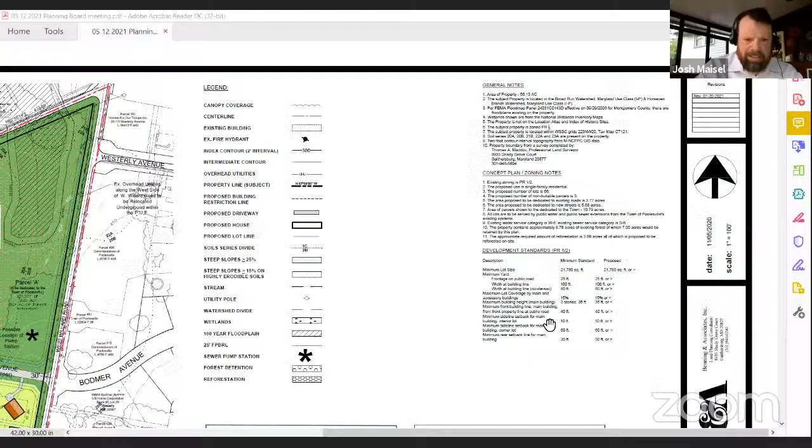Yep, now Josh is the host. Awesome. Gotta love technology. Make sure he's a co-host, Kevin, not a host, because if he leaves, then the meeting will close.

Okay, let me go back in. Okay Kevin, where am I going? Just hover back over him and make him a co-host instead of host. Well, I lost him, so I'll have to find him. Participants. I could hang out with you guys all night too.

I mean, I haven't seen Wayne in a couple years. Now Kevin, you're the host, but you're gonna have to make Josh the host. She can't do it now. There's no co-host. Josh, he's the host, you got to make Bobby a host. Right, so before you leave Josh, just make Bobby the host again. Oh, I can hit stop screen share. Yeah, and then that should be great.

Okay, are we all on board? Yep, we can see it.

Okay, so this is the plan that I brought to you guys last time after you gave us comments. We went back and seriously took into consideration all of your comments. The number of proposed lots has been reduced from 74 to 66.

So Josh, my question was, just brainstorming out of the box thinking, you know how I don't know if you've seen the Willard proposal where they have the front houses on Fisher that face Fisher, and they have rear entry via an alley or something. I was wondering if the same could be incorporated with this plan, where the front facing on Willard, instead of having driveways, are accessed via an alley.

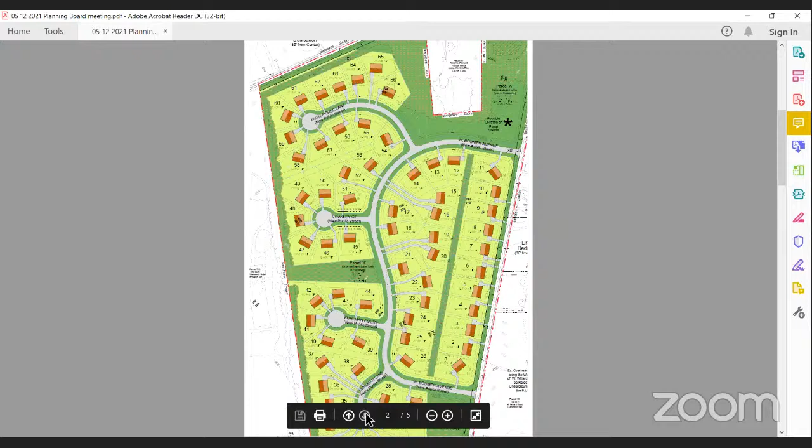Well Kevin, we got rid of most of the pipe stems, except for the back corner, and I'll speak to that if you guys give me a second. The direct drive access to Westerly Avenue has been eliminated from the plan. You guys can see this along here. We brought a cul-de-sac into there. Down to the south, the new streets with the cul-de-sacs have been added to eliminate most of the pipe stem lots and long parallel driveways shown on the earlier plan, which you guys asked us to do.

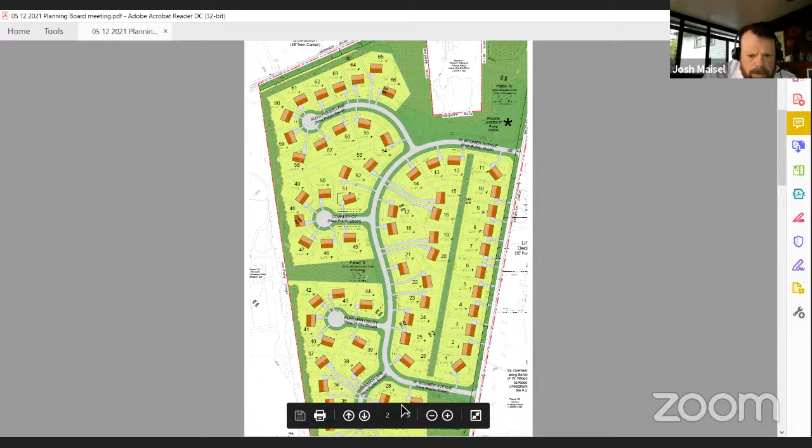Parcel A up here, this is to be dedicated to the town. It has been enlarged to retain more forest and to provide a suitable area for the planned sewer pump station. Forest conservation areas have also been identified on this plan. So that's parcel A, what's going to be dedicated to the town eventually with the sewer pump station.

And then I just have, wow, I don't understand this thing. And this is our NRI that we submitted.

With all the discussion going on tonight, I know we shouldn't be asking for approval of our concept. What I'm asking is, can John review the NRI at this point? If we're going to start moving forward with everything, John needs to have the ability to review the NRI so I can start submitting stormwater management concepts and start doing percolation testing. So Josh, that's possible, it is part of the preliminary plan, the NRI FSD, not part of the concept. But if I get direction, I can do that. I'd like you guys please to give direction to John to review the NRI for us.

Isn't it about fees also, John? Now, if there was an agreement for them to pay the freight outside, that's a separate issue. I'm sure Mr. Jameson would be more than willing to do that. Can someone reach out to me and tell me what that fee would be, or is that on the fee schedule?

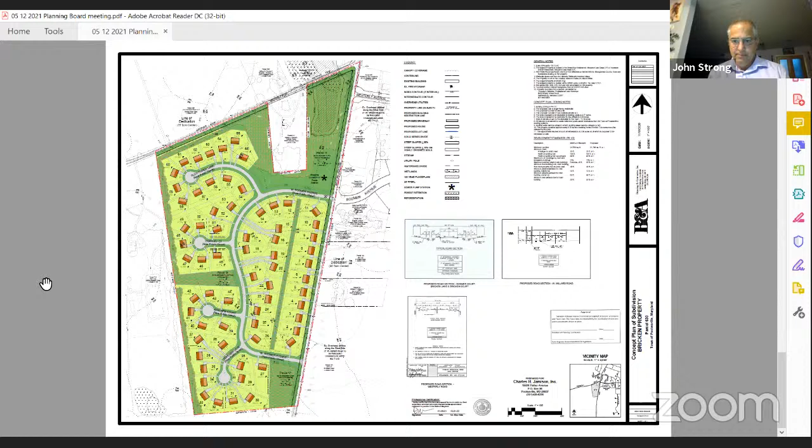Yeah, we talked about that in various scenarios with the past town manager. Amanda, thank you for letting me jump onto that discussion. No, of course, that was totally pertinent.

The next thing, as we've talked about before, is that there's no park or playground here, and this is not a super easily walkable space. Having a young child, I know how important playgrounds are to have in a community or incredibly close by. Stony Springs is not far, but the playground there is actually quite far. I don't know if you're proposing a sidewalk up by parcel A and straight up to the corner, but there's not a lot of walkability there, and it's not a super safe road to walk on. So that's a concern as well.

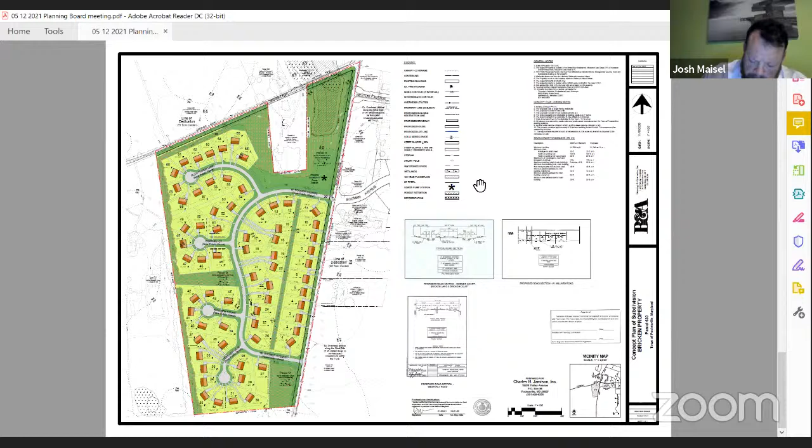Okay, and then I just want to check real quick, the dotted lines around each home site are the setbacks, correct? Those are building restriction lines. So yes, ma'am, that's correct.

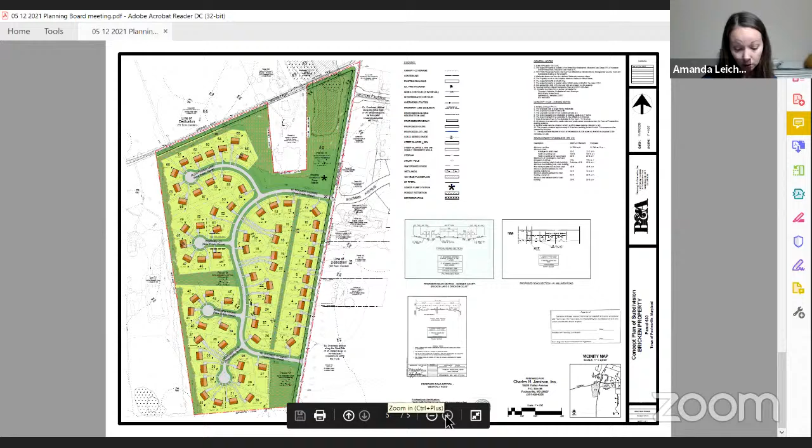If you look at some of the homes, particularly home site number 40, 43, and 32, if you zoom in particularly on 40, there is no room next to the edge of the house. The one edge of the house is literally on the setback line, and that would dramatically impact the homeowner if they ever decide they want to build a deck or anything. You can see home number 40, there's nowhere to do anything in that backyard. Correct, at all. So I think 43 is the same, it's just the opposite corner of the home.

The building restriction lines, if you look at the code, it's what's under roof. So there would be other areas that go into that. It's just the building restriction lines are for the actual physical building. The zoning codes have different rules for accessory structures and swimming pools, stuff like that. So like an enclosed deck or something, if it was enclosed, then it becomes roofed and therefore part of a structure. And that is odd that you should bring that up, because I was bringing it up.

That is page 82 of the code, definitions, building line number 23. And it reads: a building line is a line beyond which the foundation wall or any enclosed or covered porch, vestibule, or other enclosed covered portion of the building shall not project.

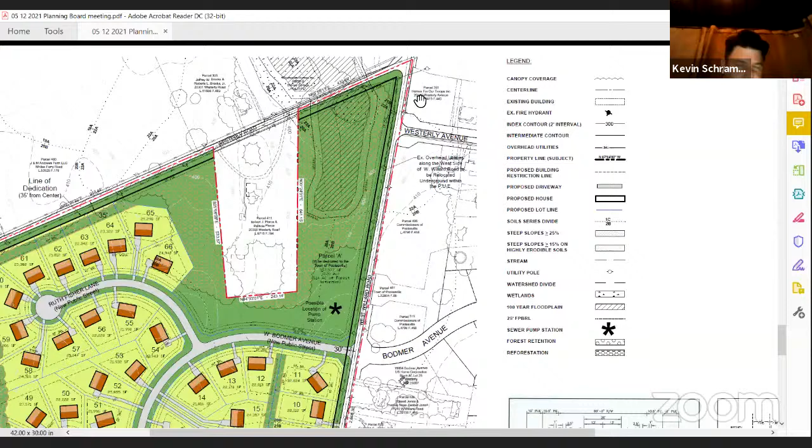One last thing, and this goes along with what I was saying about the layouts of the homes—knowing these could be very different, homes 11 and 1, which are on the diagonal matching how Stony Springs' corner homes are positioned, it makes it so there's no room for a backyard. I don't know if these are on the same angle as the Stony Springs homes, but potentially changing to a larger angle so there's more backyard space might be helpful, since they can go anywhere in there. So I guess it doesn't particularly matter right now—I could change the plan, but when they come to build this, they would build what they want to build.

And I don't want to have a bad reputation down the road and think that I presented something to you erroneously and lied to you. That's not what I want to do. Okay, I live in this town—I don't want to destroy my reputation. I enjoy living in this town.

Yeah, you guys are just asking some things that in reality can't be enforced unless you create some means for it to be enforced. Amanda, one of the other things is when we get to this issue of zoning compliance, we'll talk about the way that the side yard and the backyards are determined on a corner lot. So it'll be a little bit of an education there too.

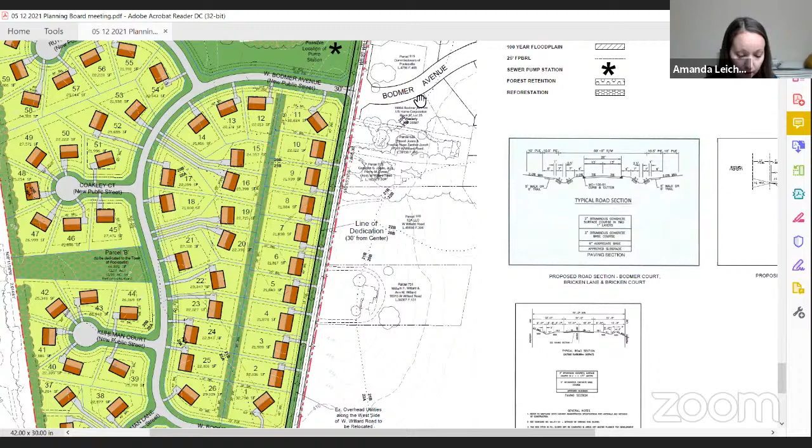Perfect, thank you. Those are my big things though, the pipe stem driveways, the park space, but I didn't realize there was a playground directly across the street. I obviously wasn't on the planning commission when that was planned, not even constructed yet either, so I don't know how you would know, since you weren't on the planning commission back then. Right, so I didn't realize that, but the playground not being there, not having the pipe stem driveways, those are kind of my big ones at this point.

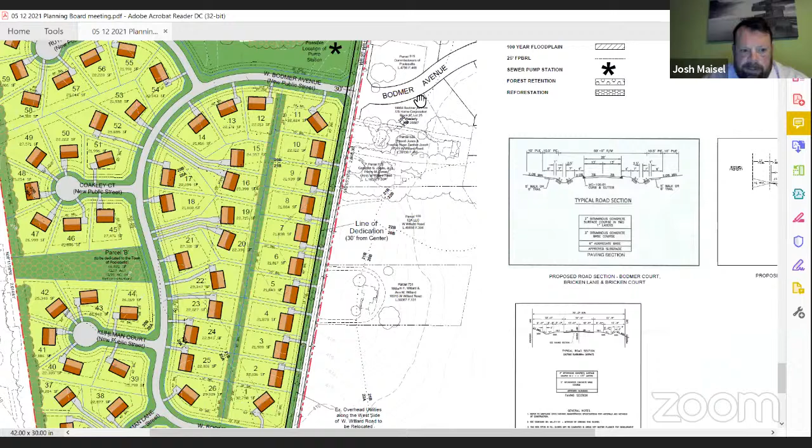Thank you. Hey, Josh, can I ask you a question? You referenced the playground that's going to be built across the street, and the thinking is that playground would serve that community and this community, or that development and this development. How many homes is that? It seems like there could be a lot of stress on one playground. Do you know? At Westerly Grove, there's 59 homes. And in this one, we're at what, 66?

Hey Wade, do you know a typical ratio of playground to residents? Off the top of my head, I do not. It depends on the size of the tot lot. Is it a multi-age tot lot? Is it going to be big enough to support it, is your question? I don't know the exact size of the Westerly Grove tot lot that's planned. I think that's something we should look into, and maybe we do want another playground in the Bricken project. I don't know, that's something to look into.

And while I'm talking, I agree with what Amanda said about the pipe stem driveways. I don't like those at all. There's like 5 or 6 of them that I think probably should, in my mind, should go.

I'm confused. The way that you have the homes on West Willard, I know the driveways are facing the street, but are the homes themselves facing the street? They are, right? The front of our home is facing. Yes, sir. Yeah, okay. So yeah, I agree with everything Amanda has said so far, and what Kevin has said. Those are my initial thoughts, Josh. Thank you.

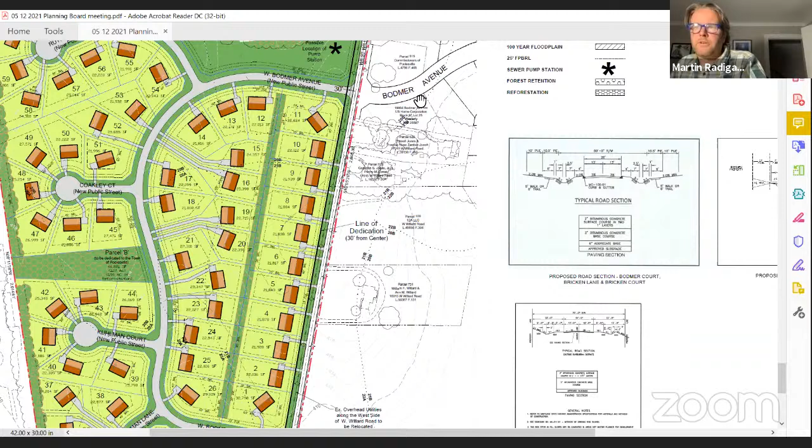Excuse my ignorance, I want to back up. I don't have anything to add. I think every one of my concerns has already been touched on by another committee member, but can you please just clarify for me, what is an NRI and what is a PIA agreement and what is the separate fee for? This was a very quick discussion and I knew none of it. So can you just take a moment and bring me up to speed?

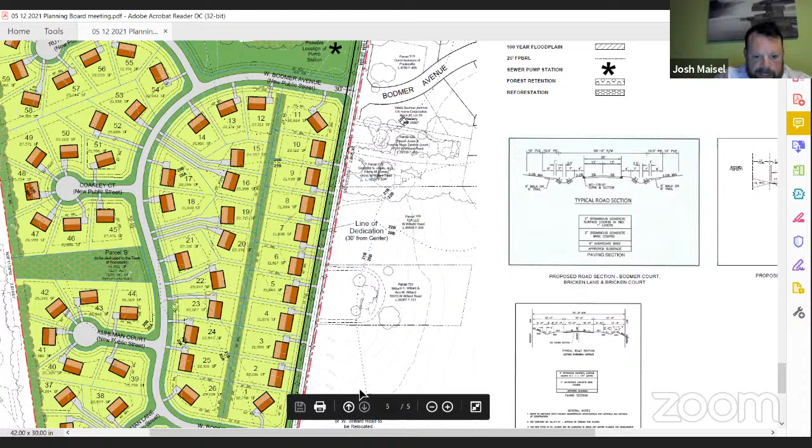NRI, that's a natural resource inventory, forest stand delineation. That's my plan that shows all the natural resources of the property. It's controlled by the state of Maryland.

So what happens is Josh would go out and do a survey as a licensed landscape architect, I guess that's the correct way to say it. He determines if there's any endangered species, any archaeological things visible on the surface, those kind of things that would preclude a special zone, or if there were any champion trees or particular vegetation species that needed to be preserved. This is done by them.

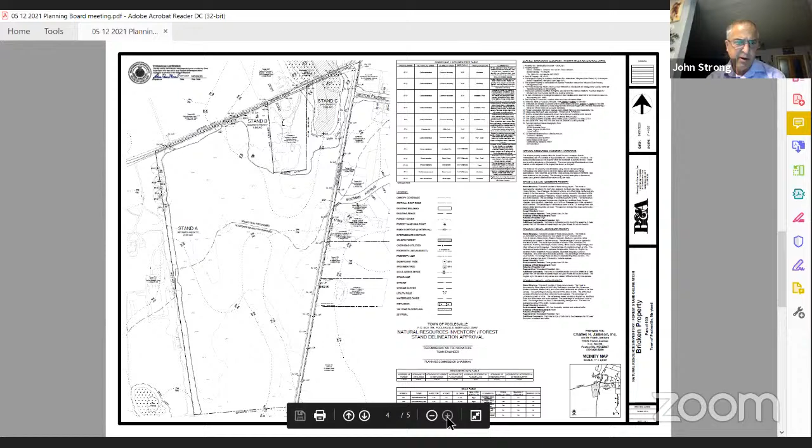And then we back check it with staff to make sure that items that could be impacted are correct in the report. As you can see, Josh, if you'll zoom to the upper left corner of your plan, you can see there are some significant trees shown on the NRI plan.

Pull it over a little bit. You see the little circles with the boxes and X's there? It says ST4, ST6, ST7 - those are trees. I haven't looked at the plan yet, but I'm sure it says what they are. So I have a chart over to the side that matches up with each number.

I identify the species, common name and Latin name. My credentials are I'm a registered landscape architect in the state of Maryland, and an internationally certified arborist with the hazard assessment credential. So I guess I don't want to call myself a tree expert, but that's what I do. I tell people I go out and hug trees.

So that's the majority of my work - going out and hugging trees, identifying rare, threatened, or endangered species, identifying wetlands, looking for creeks. And like John said, I reach out to DNR and they produce a list for me. If there are any rare, threatened, endangered species known in this area, they'd tell me that and I'd have to do more research on it.

So basically what happens is I go out and cover the entire property. I have to identify all trees greater than 24 inches diameter breast height, talk about their condition and health. I identify the forests - on the right-hand side of the paper there are forest stand narratives describing the forest, the dominant tree species, the shrub layer, the herbaceous layer. It's basically an environmental plan to provide all the information so people aren't adversely impacting the environment with development.

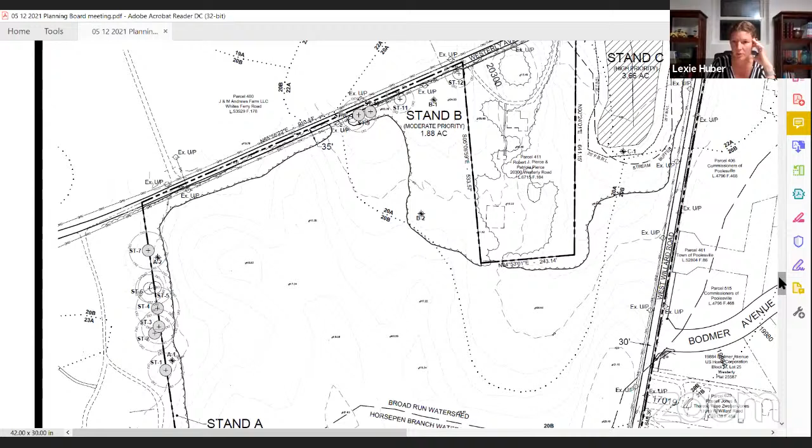Yeah, I don't have any more questions, there was just that whole conversation I needed some clarification on. I'm sorry if I'm the only one that was lost. Oh no, it's just fine, we use a lot of acronyms and assumptions, and they can go over people's heads - we don't realize we're talking with all the acronyms, and it's unfortunate.

But basically, you want the NRI FSD to be looked at ahead of the preliminary plan, when normally that would be included in the preliminary plan fees. So since it's separate, there's going to have to be a separate fee, and they would still have to pay the normal preliminary plan fee.

Awesome, any other questions or comments about this project? Do we have a consensus that this is going the right direction, or do we think they need to make a big revision and this is bad? We need to get that opinion relayed to them.

I think, well, at least Amanda and I and Martin mentioned it - the pipe stems are a concern. Looks like they're kind of crammed in. Otherwise, everything else looks good. But I am concerned about the number of pipe stems, it just looks a little crammed to me. But everything else is fine.

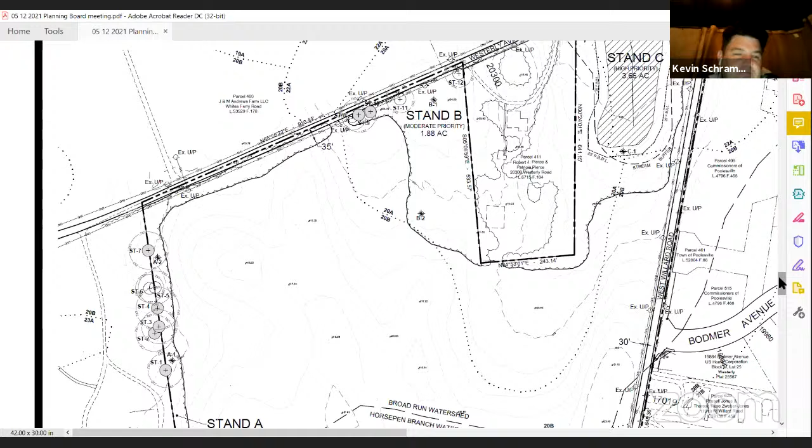I don't know if that holds anything up, or... oh yeah, that's their decision later, right? We give them the feedback on what we see, and that's their decision whether they want to move forward or make some revisions and come back and ask us for more guidance.

I just want to make sure everybody had a chance to give their thoughts. I couldn't have said it better than Kevin. I mentioned the driveways - I'm concerned about safety with the line of sight and the speed limit. If we can address that in other ways, the front facing with the driveways doesn't bother me much. The pipe stems I don't like, if that can be adjusted. But other than that, I see it going the right direction.

Lexie, you want to summarize your thoughts? No, I think I would just be reiterating what everyone else has said.

Thank you. Amanda? The only thing I want to add is to potentially look at playgrounds, because I really think that's important for communities and neighborhoods. I'd like to get some more definition on what the playground across the street is going to look like and the capacity. So I agree with that.

Martin, you have anything else? No, just everything that's been said before. Like you said, I'd like to see how big the playground is across the street, and what the typical number of homes per playground ratio is - I just don't want one playground to be too stressed. Like Amanda said, a separate development would benefit from its own little playground. And then the pipe stems - don't like the pipe stems. So basically everything you've said.

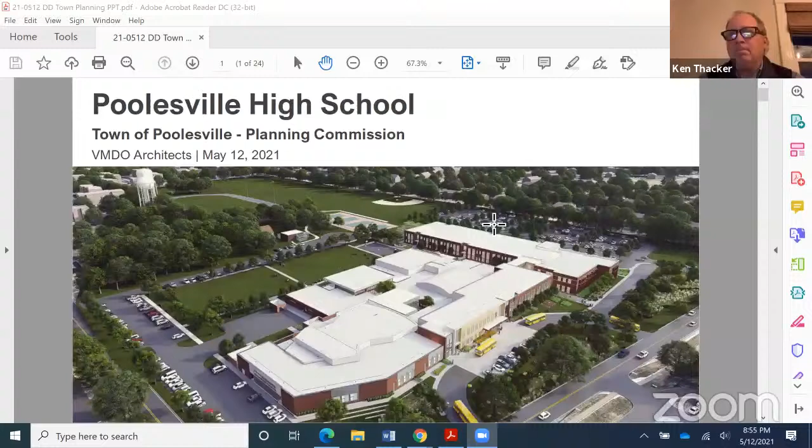All right, let me see if I can share here. All right, can you folks see that? Yep, yes, excellent. And forgive me, I'm on a computer that is not my computer for this evening, so if it's a little rocky, I apologize.

Okay, well I want to say thank you all for having us. My name is Shawn Mulligan, I'm the project manager with VMDO Architects. With me today are Ken Thacker, who's a principal in the K-12 studio, and Sean Benjaminson with AdTech Engineering, who's our civil engineer. Today we're going to talk with you about the town of Poolesville, the Poolesville High School capital improvement project. This project is an addition renovation project.

So we've got an addition onto what will remain of an existing building. The capital improvement project is currently roughly 210,700 square feet. It breaks down to about 60,000 square feet of renovation and 150,000 square feet of new building.

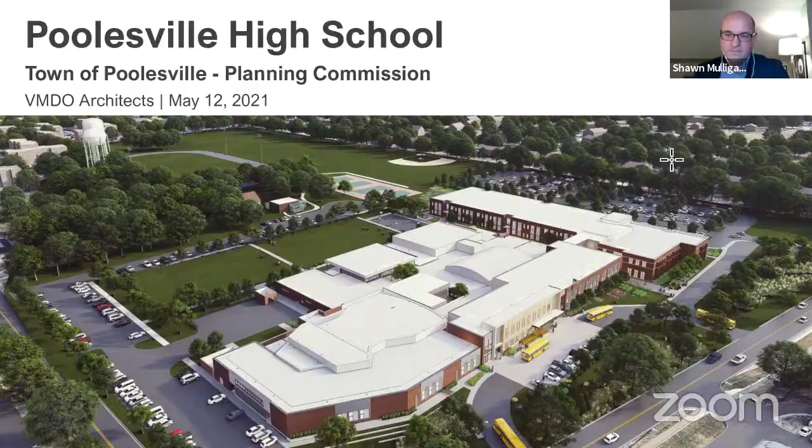Just very briefly in terms of schedule, we've got about 5 months of design left in our schedule. We'll be handing in our DD estimate, our DD pricing set for an estimate in late May. And then we've got about 5 months of design. CD should go to bids in late October, with a target construction start date of January 22.

So this is our existing site plan. I think most of you would be familiar with this view of the property. Just to orient everyone, West Willard Road is here on the left side of the frame, Wootton Avenue is to the north. The existing main building is in this area, which has been built over 6 successive periods of construction starting in the 1950s. Then starting in 2009, the detached science annex building was built in this location. The current parking lot is located to the south of the science annex.

These yellow arrows show the bus routes into the bus loop. Blue is our current car traffic into the parking lot, and currently traffic can go up this pipe stem into the bus loop. Service traffic comes off of Wootton Avenue south down the driveway to the rear of the building, and most utilities and all service vehicles come to the back into the service yard at the east of the property.

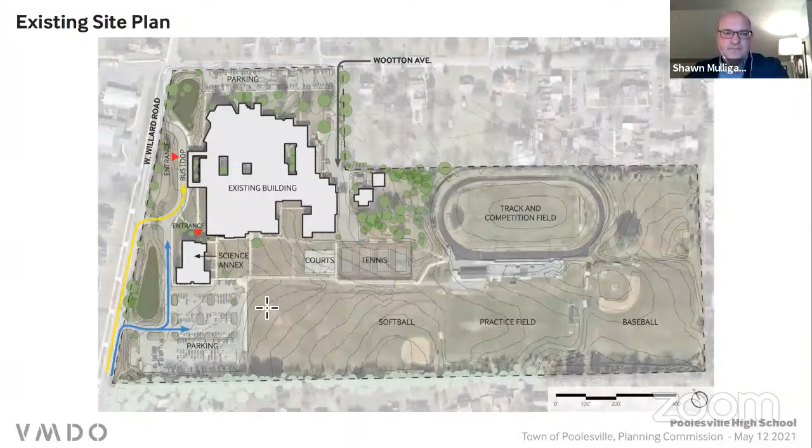The proposed plan is here, again along West Willard Road. We're working to separate auto traffic from bus traffic, closing off this pipe stem to car traffic, and expanding our parking to the south of the building over to the east, which will allow us to have a slightly longer car student drop-off if necessary to prevent cars backing up on West Willard Road.

The project includes significant additions, wrapping on the north and west sides of the existing auditorium, a two-story addition that runs along West Willard Road on the west side of the existing building, and a two-story addition to the east of the existing science annex, making a two-story L-shaped academic wing.

The athletics and PE program is located mostly where it currently is. The center of the project is a media center, kitchen, and dining terrace, and the rear part of the building is demolished, making way for two new play fields that replace the existing play and practice fields, which will be in the location of the future parking. Basketball courts are relocated to the back of the school with direct access from the PE and athletics areas.

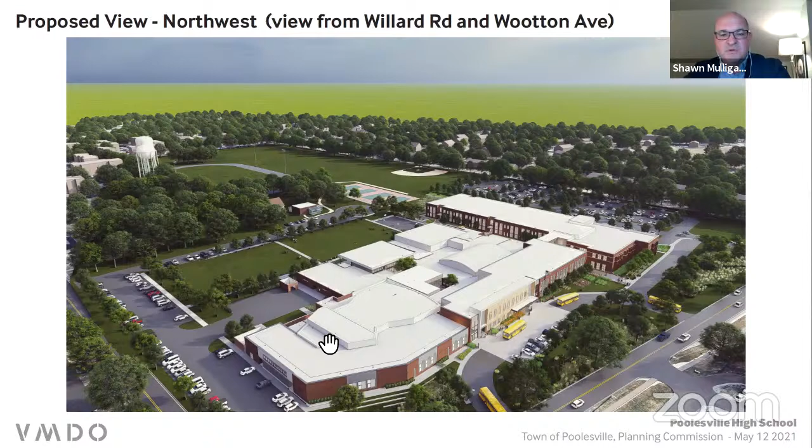So this is the proposed design. You'll recognize the shape of the auditorium, the second gym with the bow truss roof, and the main gym. Along the north and west side of the auditorium is a 1.5-story, high-ceilinged arts addition for studio art, music, and ceramics.

This is the 2-story academic addition that attaches to the 2009 Science Annex. Classrooms continue to the north on the west side in the 2-story addition, and this central section is the main administrative area. The main entry off of the bus loop faces West Willard Road, forming a 2-story L-shaped addition, with the north and south wings connected by a 2-story glazed connector.

The removal of the back half of the school provides an opportunity to create lovely green play fields, practice fields, and public spaces for community use. In the center are 2 existing courtyards which will remain and be planted as public outdoor spaces — secure outdoor spaces to be used by students inside.

In the center of the plan is the media center, and on the east side is the dining commons, kitchen, and building service. The dining commons opens out to an outdoor terrace looking onto the lawns beyond. To the south of our 2-story bar addition is the extended parking, which is the existing parking lot in its current configuration. To the east are the athletic fields and courts, which are outside the scope of our project.

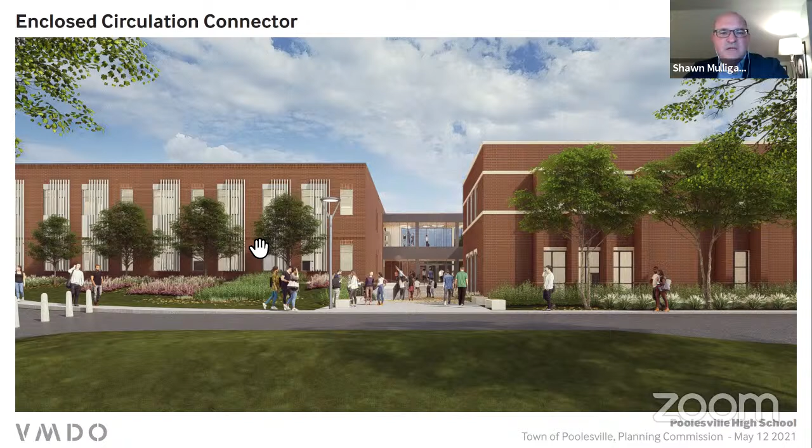This is the proposed completed design using red brick, mineral stain on the existing annex, and a blend of brick colors to create a unified palette so the buildings feel unified in design. We've got dark metal at our entries, warm wood and wood-tone products at the entries and connectors, vertical fins for shading to avoid glare in classrooms, and opportunities for planting and learning landscapes along the west side of the two-story addition.

This entrance to the two-story connector is a wonderful place for an accessible ramp, and also a series of story steps and gathering places for students as they head to events or field trips, as we know they often want to do.

Hey Sean, can I ask a quick question on that previous slide? I noticed this drawing is a little newer, updated with the metal fins. I guess my question is when and why were those added, because I thought there was a different exterior envelope in the previous version.

The exterior envelope was slightly different during schematic design. Since the end of schematic design, we've been performing a series of daylight studies to look at lighting levels, to ensure adequate light levels, reduce energy load and electric lighting needs, and ensure the best possible light for the learning environments.

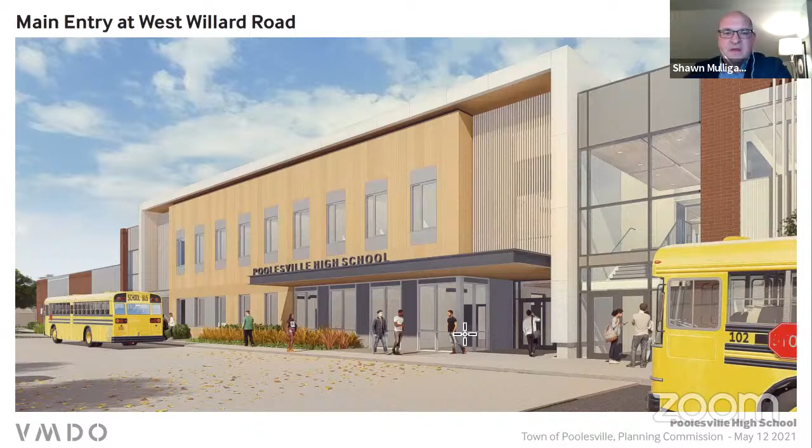The primary office is in this location. To the left, north of the main entrance, is a secondary entrance, an after-hours entrance for the art lobby, which would be the current main entrance next to the auditorium. Beyond, you can see the arts addition that wraps around the existing auditorium.

Materially, we have a dark metal, cantilevers, and a wood-toned material, bringing in the color and texture of wood as a nod to Poolesville's agrarian nature, but keeping the facades clean and crisp and refined, looking towards the future. At each of the main entries, we have metal panels wrapping a large entry gesture, and warm wood on the underside to indicate entry into the building.

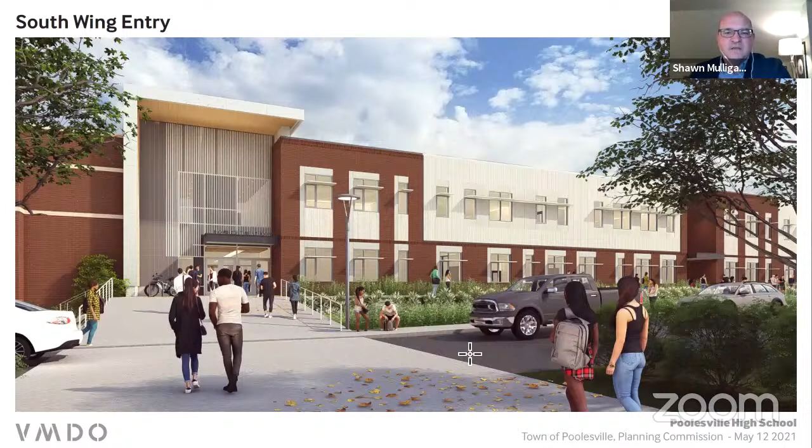And this is that view again, proposed. This is the annex with the unified look of the brick, the large entry canopy gesturing entry towards the parking area, welcoming students in, with low canopies for cover. This is the metal siding, which was in the schematic design presentation, which maintains...

We've got bioswales, stormwater management along the south of the building, gathering the water and treating it locally, which will be a wonderful place for students in the global ecology program to engage with aquaculture and the agriculture of the area. As we talked about before, the horizontal sunshades provide a bit of visual interest, also reduce glare, and act as light shelves to bounce light further back into the classrooms.

I don't think your slide changed. At least I don't see it change. Are you guys seeing it? Yeah, I see the slide change. Okay, oh, I do now. Sorry, okay, must be my machine. Must have been going too fast. Apologies.

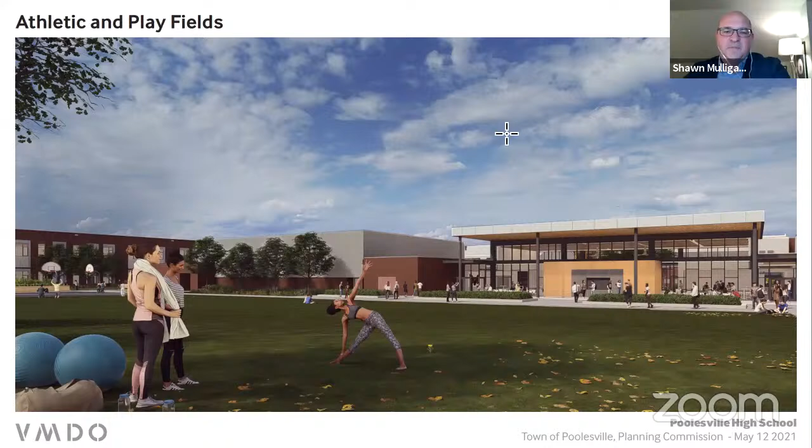And this is the proposed design. Again, these are our practice and play fields, ball courts to the south side of the play fields. That's our two-story academic addition beyond. This metal clad volume is the volume of the existing main gym, which now has direct access to the outdoors and access to the play courts and play fields.

In the center here, or over to the right-hand side, this is the glazed dining commons with a one-story, two-sided concession stand, which can function as a school store, concessions for events for both theater performances as well as athletics. And the dining commons area functions as a kind of a pre-function lobby for after-hours events in the main gym as well as in the auditorium.

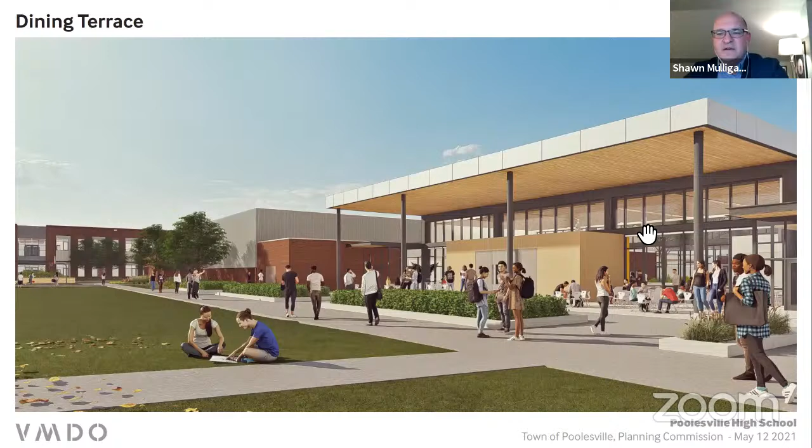And to get a little closer to that area, this is that dining terrace. So directly off the dining commons, a covered outdoor area for students to gather, for classes to be held, for students to work with and collaborate together or with their teachers.

And you can see beyond the kind of open glazing into the dining commons, and then you can see the courtyards that are at the center of the design beyond, which connect the dining commons to the media center. And there are courtyards flanking either side of the media center to bring in a little bit of light and a little bit of greenery and biophilia, which has tremendous benefits both for health and well-being and also cognition.

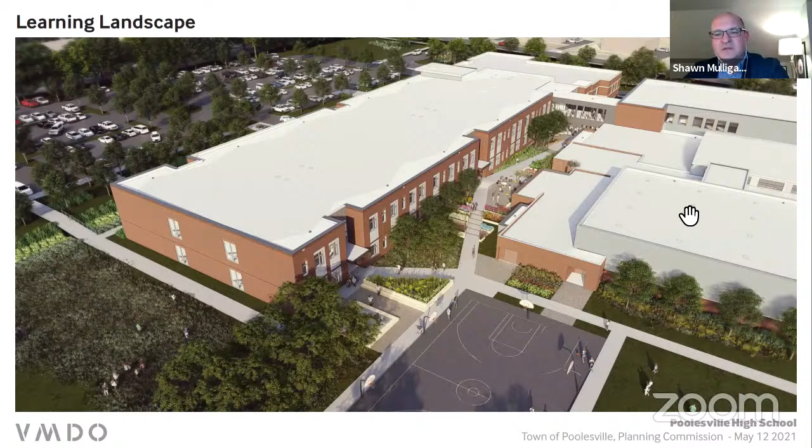This view is a view a little bit from the air. To orient you, the main gym is here to the right, that's the metal clad volume there. We're renovating the existing athletics and PE spaces in the existing building. I have really reduced the square footage of the project since schematic design and fit the program into the existing footprint. This is our two-story academic addition coming off of the 2009 annex.

That's that two-story glazed connector. And this is probably one of the most exciting parts of the project for us - this wonderful space between the two buildings that we think of as a learning landscape. It's a secure outdoor space with a fence and a gate on the east end, the two-story connector as the other secure end, and classrooms and athletics and PE spaces can open directly onto it, a wonderful place for students to come together.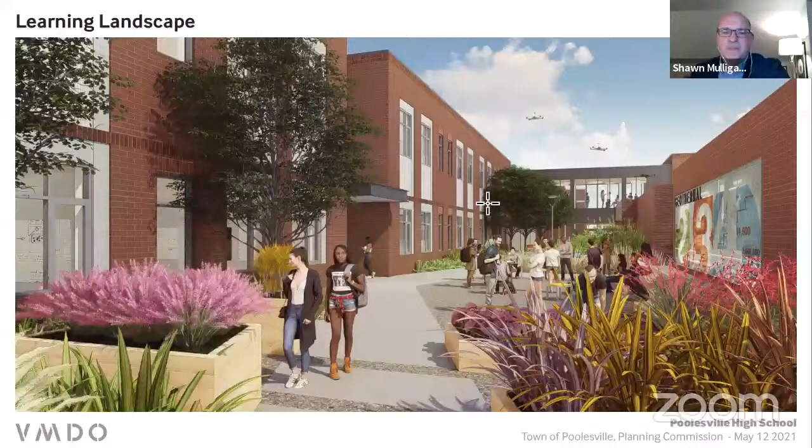So taking this as the existing view of that space, and what we're proposing to provide at the end of the design is this. So this is our academic and classroom wing to the left, and lots of spaces for impromptu lectures, performances, class gatherings, dining and gathering of students. Great place to have drone races and practice all of the things that I'm sure the SMCS students will get up to in that area.

And some opportunities to introduce environmental graphics and talk about how we can use the building as a teaching tool to talk with students about geothermal systems, about water and water cycles, and how these bioretention areas treat stormwater on site and contribute to the health of the waterways in the region.

And that is what we have to show you. I hope that's been at least a relatively quick but thorough look at the site plan and the exterior of the building. I'd love to hear any comments or questions you might have.

Hey, Sean, Ken, jump in if I missed anything. John, do you happen to have the forest conservation? Because that's kind of a thing that we got to get through. Do we have a plan for the forest conservation we can look at real quick? Yes. I'm sorry, I thought I had it, but I'm not on my machine. Let me see, perhaps our friends at AdTech might be able to get to it. Okay, yeah, I'm looking for it, Sean.

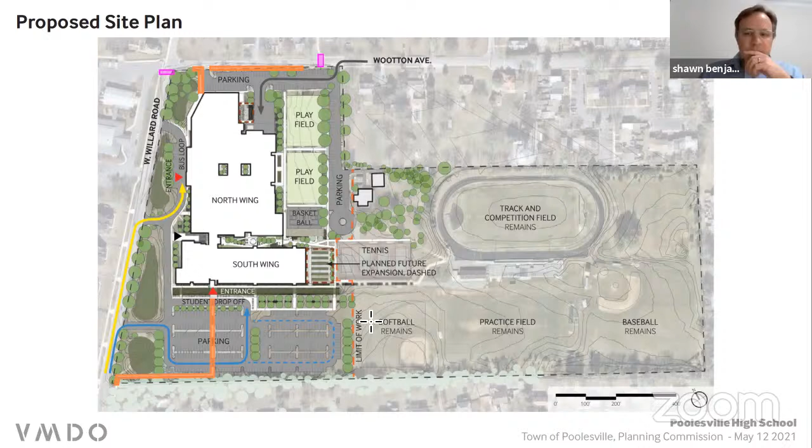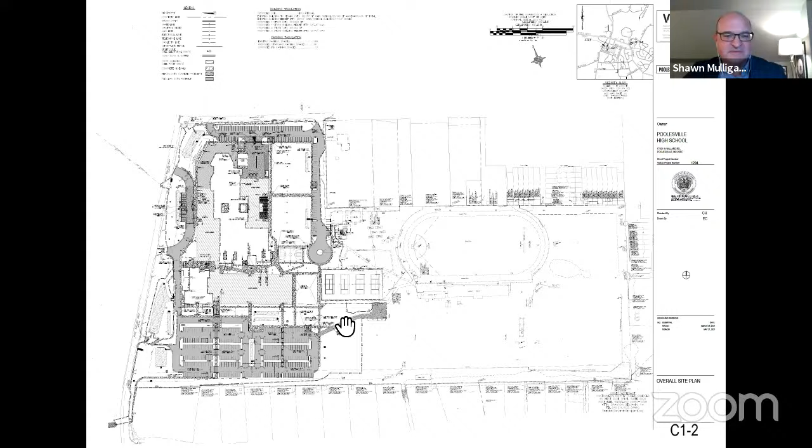I have our civil site plans, but I don't think that's going to help you. Yeah, that won't help in that conversation. No.

Would that previous overlay help? No, but if you'll let me, I can describe it. What's taking place is where the parking lot is, you see the orange right down here. In this area, there's an existing forest conservation strip that runs along the south side of the project, then comes up the east side and into the north side. The proposal is to take the parking lot area you see here, convert it, and take that square footage of forest conservation and rotate it to the northeast corner of the project.

See if I can pull it up. Hang on, if I have the drawings in front of me. Yeah, the drawings, okay. Alright, so who's speaking? This is Sean Benjaminson. Sean, so what has to happen in order to show that is somebody needs to make Sean the presenter. Yes. Bobby, you still here? Gotta reclaim, and I'm making Sean the host. Sean Benjamin, yeah, okay.

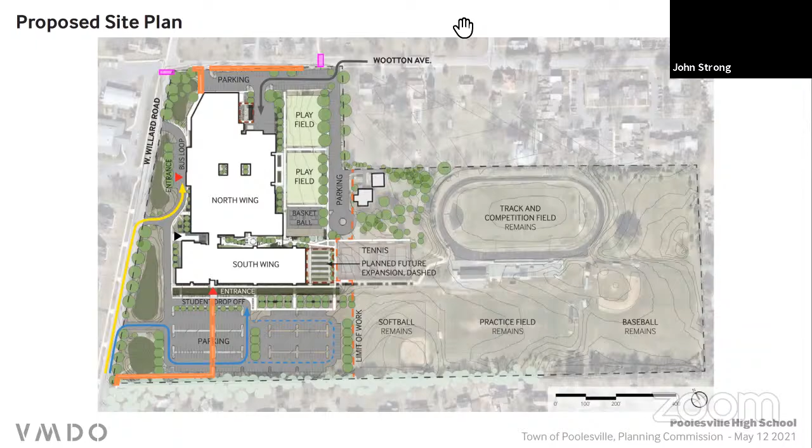There you go. So here's the forest conservation area over here. And like you're saying, John, here's the other forest conservation area that we're expanding in this zone. So here's the football field and track, on the far east side of the property. And then these other areas remain here along the south and east. So what it does is it enlarges that northeast section of the project to have additional forest conservation. But that would need a recommendation from the planning commission to the commissioners to accept that change, from what it was to what it will be.

Hey John, just a quick question. The existing forest conservation, they wouldn't remove any trees, right? I thought all those trees were in the backyards of the homeowners. Well, they're not, they're along the property line, on the town side. If it's on private property, they can't remove them, but trees along the property line can be removed if you grant the forest conservation relocation. But you're right, Kevin, that was initially when the other building was built, they put the forest conservation there as a buffer from those homes. Correct. Is there anything planted, or was it mowed all the way up to the property lines? It is mowed because it's a class 2 forest conservation area, not a class 1. Yeah, it's maintained. And the other lot, for as long as I remember, that's just been an empty grass lot, and it makes sense to move it to that corner by the townhouses.

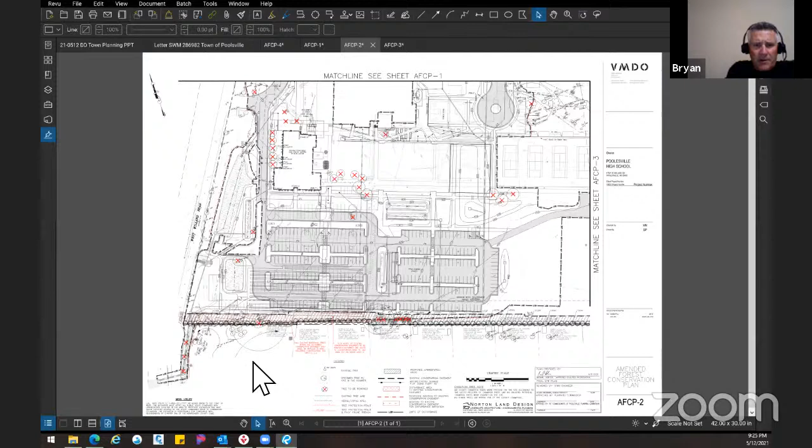I would make a motion. Yeah, I'm going to follow up on your question though, Kevin. Even if those trees are on town property, do they need to be removed? I can't tell if they're X'd out to be removed. Yes, there's an existing red maple here, and a couple other trees along this side as we attempt to widen and expand the parking lot. The management, as well as what's important, is pedestrian access to the site and limiting the number of places where students have to cross driveways, putting it in a place that's safe. So doing this is really attempting to improve that pedestrian connection. And you look like you're being selective, it's not arbitrary. I see what you're doing with the removal. I'm okay with that.

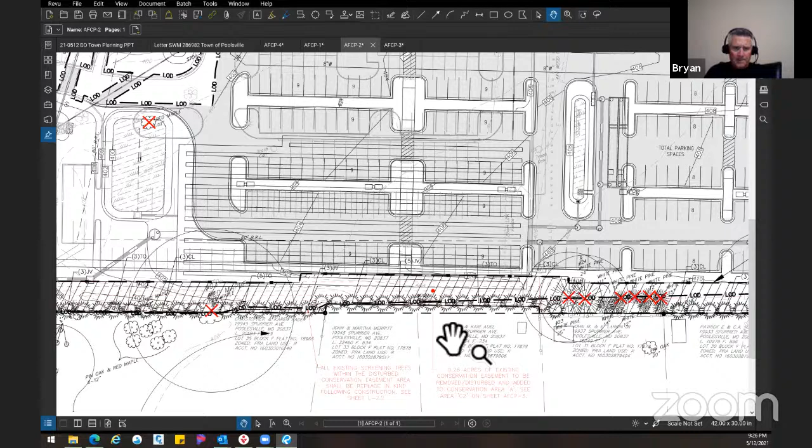And in terms of square footage of forest conservation, it's 1-to-1, what you're putting back versus what you're removing. Correct. We'll still need a forest conservation plan eventually, but this concept has to go forward in order for them to do what they need to do.

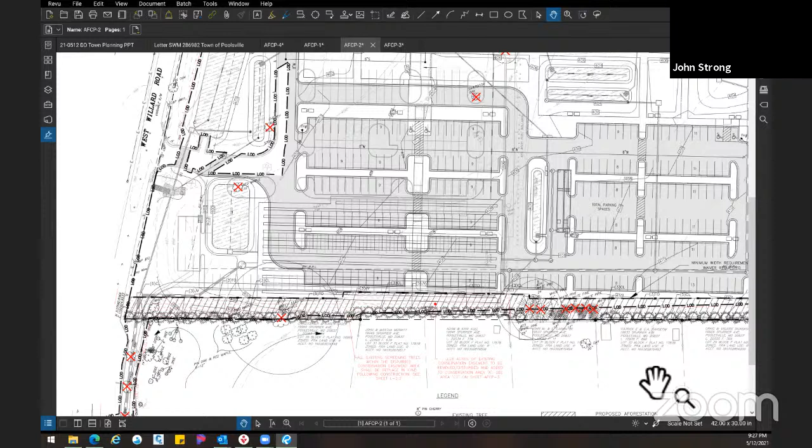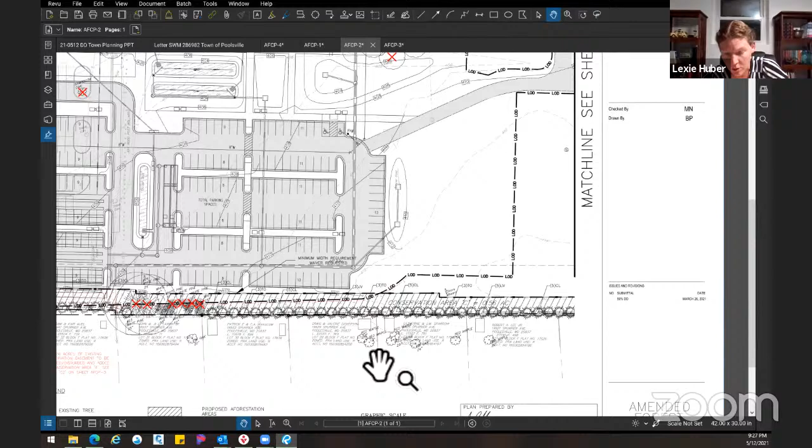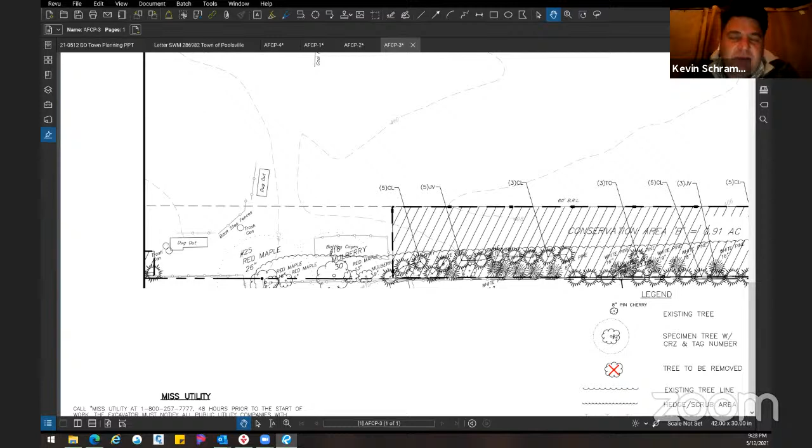Can you move east a bit on this page and tell me what's going to happen with the cut through? I don't see it in your schematic, but there is a cut through in this general area. There is a sidewalk that goes through these residential properties and onto the high school land. It's down by the softball field, I think, Lexi. Is it farther down? Yeah, so the divider, that path goes between the girls softball field and a practice field. Right, okay, so it's farther down. Is that going to be paved? Because right now it just spits you out onto grass. It would be nice if that was paved so it could connect that neighborhood to the school.

That area is outside the limit of the scope of our project. Okay, want to add that to our advocacy efforts in addition to the new gym and the wellness center.

I thought you said the gyms are being renovated? Yeah, but not to the full scale in line with the rest of Montgomery County high schools. Our gym is far less than what other Montgomery County high schools have. So Fair Access Committee, along with PTA, is advocating with the Board of Ed and county council members to increase the budget for this project.

But that makes no sense at all. I mean, look how long it took us to get a renovation of the building. We haven't had any renovation of the gyms, and they're going to come out and do this work and then leave without really getting the gyms up to date. And how long is it going to be before they come back to do that?

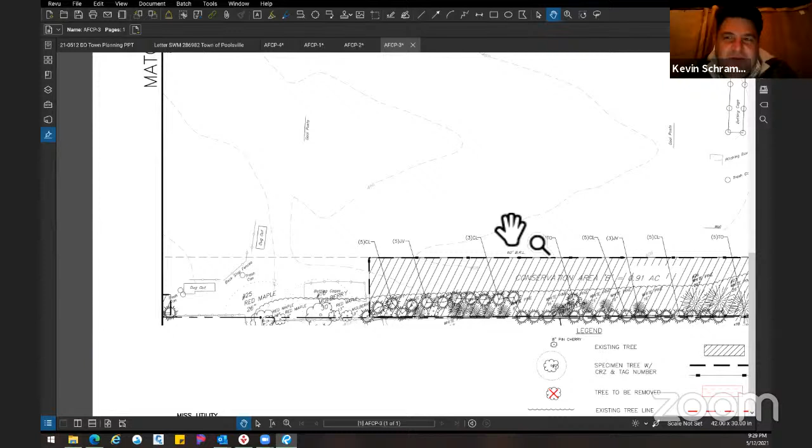Because that's exactly the point, and that is the point of our advocacy. This is Dennis Cross with MCPS. The existing gyms are being totally renovated and updated. They will effectively be new spaces. Now, Mr. Schramm is correct that they are remaining existing gyms.

That's a result of the overall budget, so that's certainly something that can be addressed if need be. Yep, so that's what we're addressing. But they are new, I mean the gyms will be totally outfitted, basically new. You won't be able to walk in and see the old gym by any stretch. So I just wanted to put that in context.

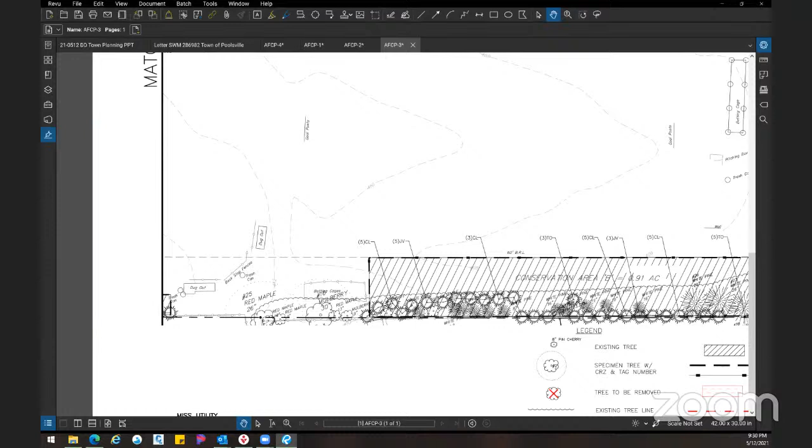That's all. Okay, I'd like to see, I don't know if it's under our purview here or not, but maybe Kevin can bless me one day with the description of what that actually means. Kevin and I are graduates of that high school, and when we walked in there as 7th graders, that's the way the thing looks today, right? I mean, we're not young men anymore. It's been a while, and I can't imagine.

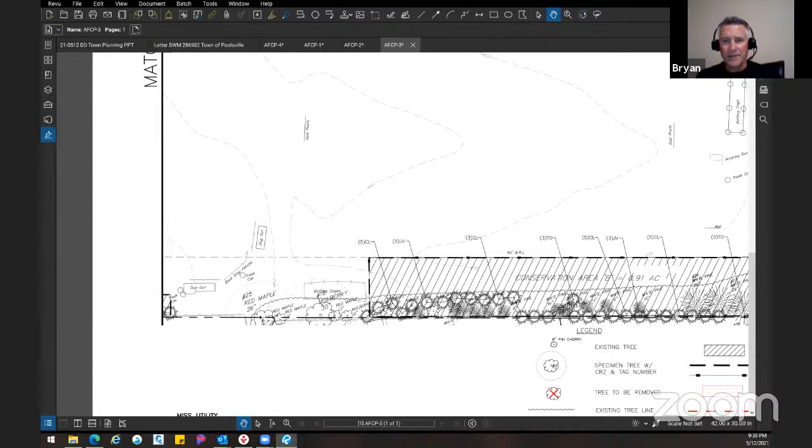Yeah, I hope that it's a significant and up to date renovation, and not just a fresh coat of paint. Yeah, it's going to be, from what we understand, a fresh coat of paint. It's not increasing the size, which is the main problem with those gyms. Those gyms are essentially middle school gyms. Yeah, they weren't big enough when we went to high school there, and it's 3 times the size of when we went there.

Yeah, and the PHS has more student athletes. It didn't stop the girls from winning the state championship in basketball. No, but it did keep a lot of people from being able to watch it, and I'm not joking. Yeah, that's right, I watched it in downtown Poolesville, so I didn't have any problem.

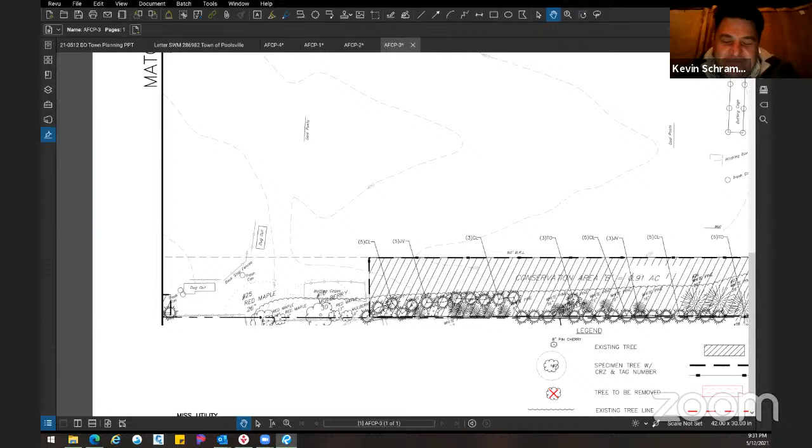But that's what we're advocating for. So we would like to see, maybe in the next drawing, where you had those red dots that put future expansion - I hope the next drawing includes future expansion next to the gym instead of the basketball court that is proposed. Yeah, so that's what we're pushing for.

I know it's not in your guys' purview, you're just the designers and architects of what you've been asked to do. But that is a big thing with the community, and that's an issue with the BOE and the county council. And we've come this far. Why it's a mere small percentage of the total capital budget for MCPS, it's hard for us to fathom why this improvement isn't included.

But again, that's not Sean and that's not VMDO's, right? Dennis is the guy we got to bend his ear. Well no, we got to bend the BOE and the people who control the money, further up the food chain than Dennis.

We've worked closely with Dennis to try to shepherd this budget-challenged project into existence, and continue to work very hard with MCPS to make that happen. Kevin, I fully hear you, and we've heard you since the beginning. As Dennis said, I think it's a little outside of our purview here. We're trying to make the best possible school we can with the money that's available, and in the CIP.

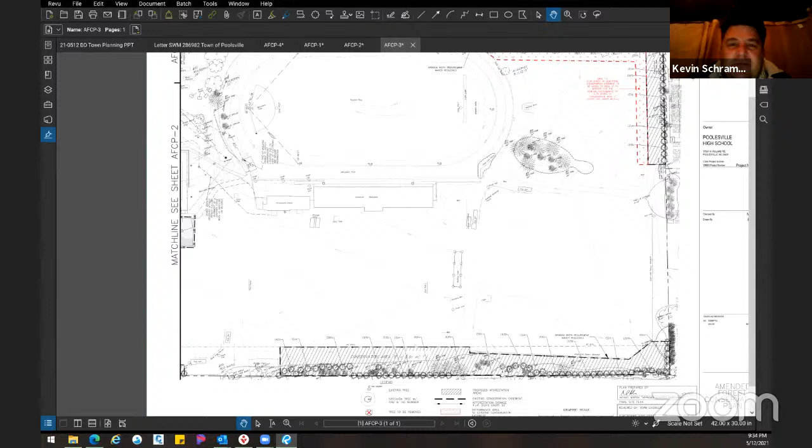I think there's going to be an announcement at the May 18th PTA meeting, because there's going to be some fencing off and construction going on during the summer in preparation for the major construction starting in January. I don't think those plans have been finalized, but they'll provide them at the May 18th PHS PTA meeting. Sean, correct me if I'm wrong. That's correct, and I think that's the right time to talk about that.

Okay, just the scope of that and what will be available. Another question: is there going to be a sidewalk on West Willard? Yes, there is a connection to the crosswalk at the northwest corner of the property, at the corner of Wootton and Willard, and then a connection that comes south through the parking area, west towards West Willard, connecting to the parking lot at the southwest corner.

So we're basically tying into existing parking lots at the northwest and southwest corners. And what green measures are you incorporating into the project, in terms of sustainability? Throughout the project, like on all MCPS projects, we'll be using high-performing LED lights, low energy use lights and fixtures, including the food service equipment. We've got a high-performing building envelope, which reduces energy loss and heat gain, and a right-sized mechanical equipment system.

We're using a geothermal system along with that to reduce the overall energy consumption of the building. This building will be designed to be net zero ready, meaning it will be ready to receive, when MCPS is able to procure them, PV arrays to offset the energy usage of the school. This is a big challenge because it's a large addition-renovation project, and making that net zero ready will require a great deal of work, but we think we can get there with the team we've got.

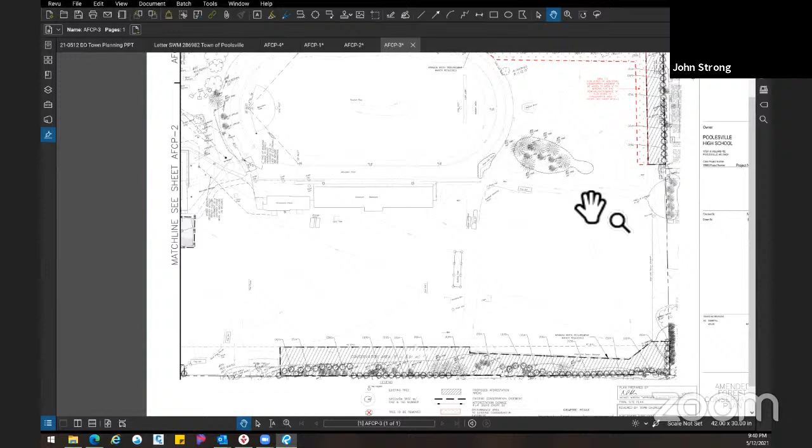I think Sean, Benjamin, if you move to the other plan, I can point to where that occurs. There are certain geothermal systems that are not allowed within the town because of wellhead protection.

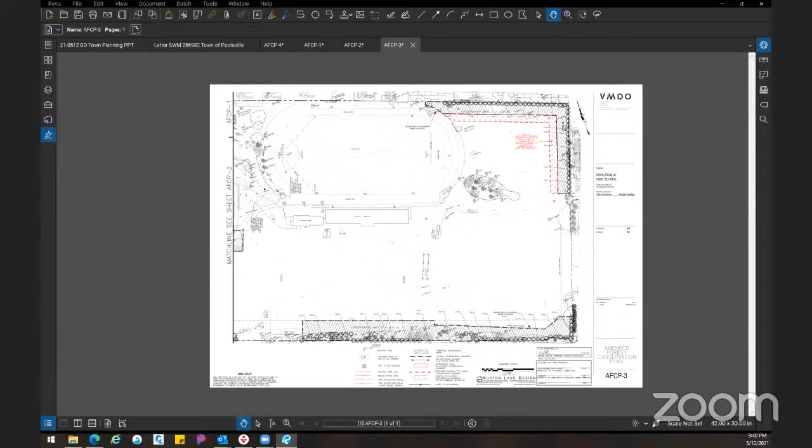Understood. John, we had that come up with a resident a couple years ago, right? They wanted to install geothermal. Correct, and it went into our aquifer. That's the concern, that it seeps into the aquifer and causes a whole bunch of other issues. We recommend looking at the wellhead protection plan, which is in the town code.

Were there any other questions or comments? I don't think so, you got all my questions. Thank you very much.

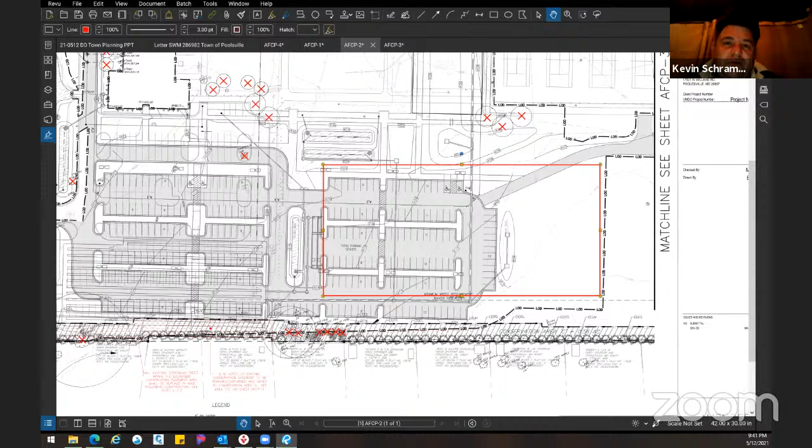I wonder what our next step is relative to this group after this presentation. I guess, Brian, our first step is the forest conservation. Is that an approval for tonight, or are we going to? John, did you have more to look at? No, I need to be able to take it to the commissioners, relocate, and then we'll get into the guts of it. And what's your opinion on it?

It's a good fit. It creates a deeper density of forest, and it does cut back on some things. The only thing is, depending on how things play out, you may need to put some plantings along there for screening.

Wade, you got any comments on it before we make a motion? No, John's recommending to go ahead and approve the forest conservation at this time.

I'll make a motion that we recommend to the commissioners the relocation of the forest conservation area for the modernization of PHS. I'll second that. All in favor? Aye. Aye. I couldn't see Lexi and Amanda, can you just verbalize for me, make sure we know. Aye. Aye.